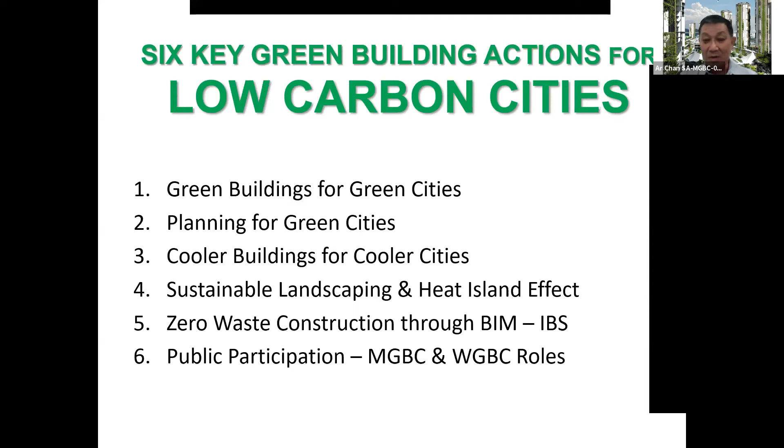Okay, so the next one I will hang on, let me proceed. I don't know why it doesn't allow me at once. Okay, at once downwards. Okay, it's a bit slow, the reaction.

I look at the green building index - is it the right tool? I think there are many tools in Malaysia right now. So we ask ourselves, what is a green building?

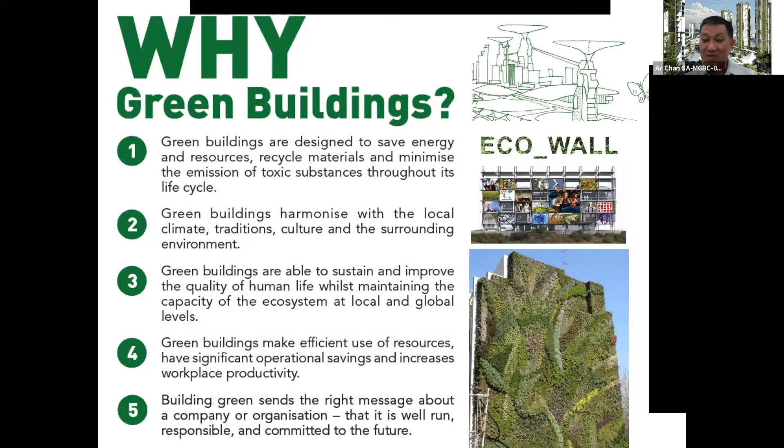Green buildings are the ones which are designed to save energy. They are harmonized to the local environment. They are able to sustain and improve the quality of human life, efficient use of resources, and of course it sends the right message also.

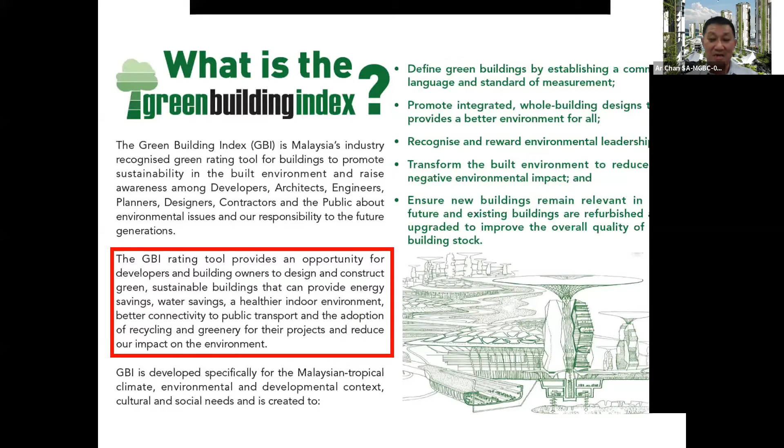The green building index is one of the major rating tools in Malaysia. We founded this initiative back in 2009 with a handful of architects and engineers, and of course industry partners - they're very important - and even Malaysian developers were part of the team in the early days.

Now, the Green Building Index, when it was founded, was one of only 2 building tools that were able to handle what they call equatorial climates. It's one of the few tools recognized by the World Green Building Council.

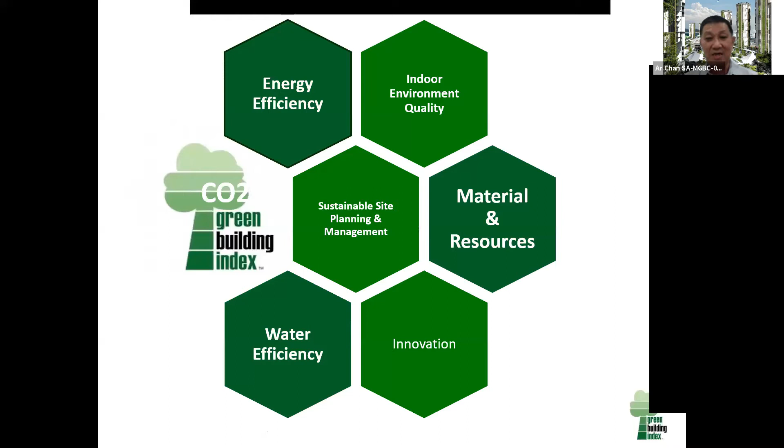In the Green Building Index, we emphasize 6 key components: energy efficiency, indoor environment quality, sustainable planning, material resources, water efficiency, and innovation. When we launched it in 2009, we developed 2 tools: a non-residential tool and a residential tool.

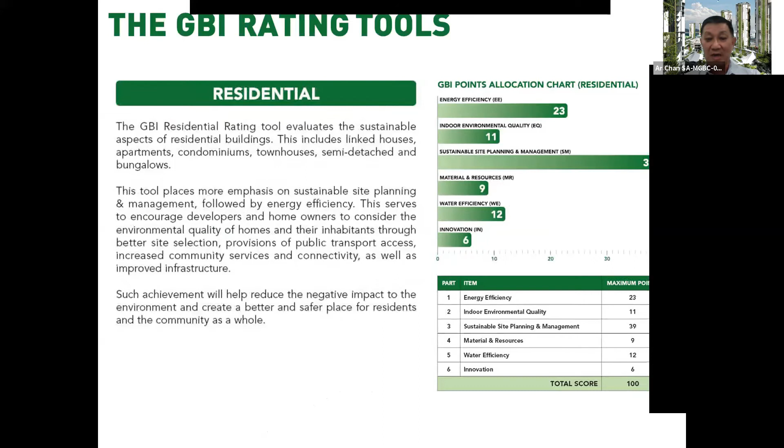If you're looking at the benchmarking of the tools, we already have 10 years worth of information - real data already - and more than 1,000 buildings, and more than 20 million square feet worth of buildings already certified. And if you go back to the database, this is very important in today's environment whereby big data becomes important.

We can see we are learning from the past, from the data that we have. In May 2009 we launched the building index, and this was one of the first non-residential buildings. This is the residential building, and then on 28th April 2010 we launched the Green Building Index for existing buildings.

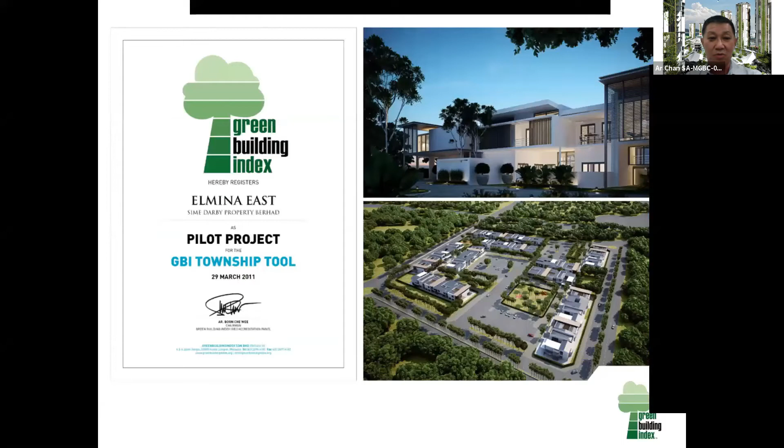We also launched the Sustainable Township in 2011. You can see many pilot projects going through in that. Very important is our green factories.

Why is it important? Because in Malaysia, more than half the electricity produced is actually consumed in our factories. They are an important driver of our economy, and we have to make them very efficient, because in our tool we don't just look at the shell of the building, we look at the entire industrial process of each building submitted for approval in our Green Building Index. This is one of the very unique tools. Other countries don't have it. Even Singapore developed their tools, but they don't look at it that way.

Some early buildings have submitted. Now, even though we have developed 16 tools, we've now gone to 18 tools already. Each time we find significant progress in the industry, new information coming in, new ideas coming in, we update our tools. For example, our residential tool we developed in 2009 has now already reached version 3. Why? Because we need to raise our standard, and also incorporate new ideas that we find from our big database.

So it's on the ground data. It's important that we move forward and improve our tools also. At the same time, we need to emphasize that these tools were not developed in isolation. They were developed with the cooperation of all the respective industries.

For example, our industrial new construction and industrial existing building tools were all developed with the cooperation of FMM. Our tools for hotels and resorts were developed in conjunction with the hotel owners association. So they give us data, we use the base data, and then we develop the tool, and ask for feedback from them. This is where the tool becomes relevant to Malaysia.

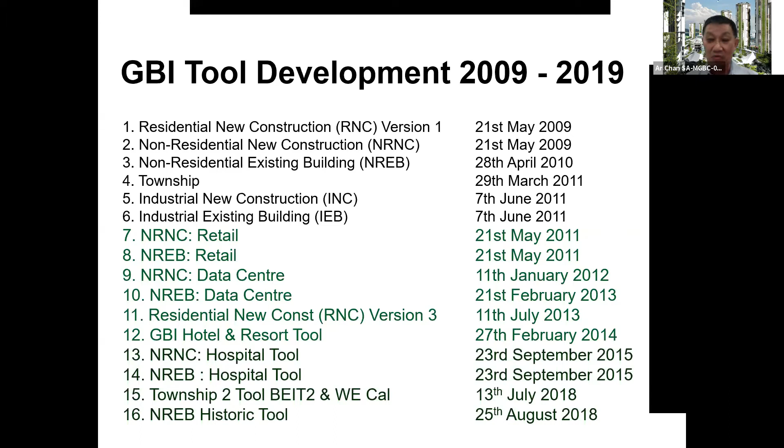Because sometimes complex issues need a lot of collaboration so that we can go further in whatever we do. So these are some of the developed tools, for example the malls, data centers, hotels - all these certified buildings. As of February 2019, the beginning of last year, you can see we already have nearly 500 certified projects, constituting nearly 1,000 buildings, really more than 1,000 buildings.

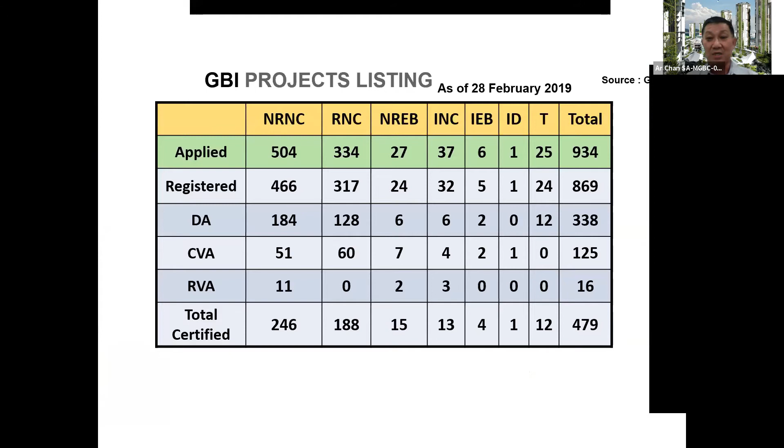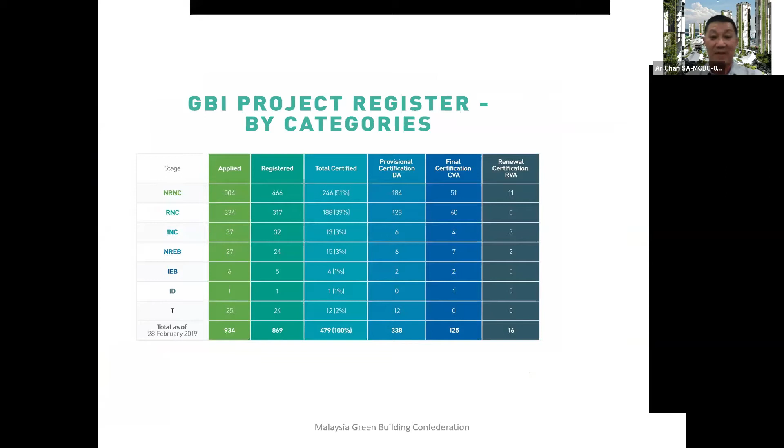If you look at it by registry, we can see the majority of the buildings are in the NRNC, non-residential category, then followed by residential, the general two, then the rest are all less. And you can see the majority of the tools are also in the certified tool category. Certified meaning best practices - buildings which have been designed to achieve best practices.

Whereas gold tool buildings achieve gold, they are best in the nation. If you go to platinum, you are the best in the world already. And sometimes, although they are best in the world - sorry, best in the world - sometimes the economics might not make sense. So it has to be a proper balance. It's up to the individual owner how they want to achieve that.

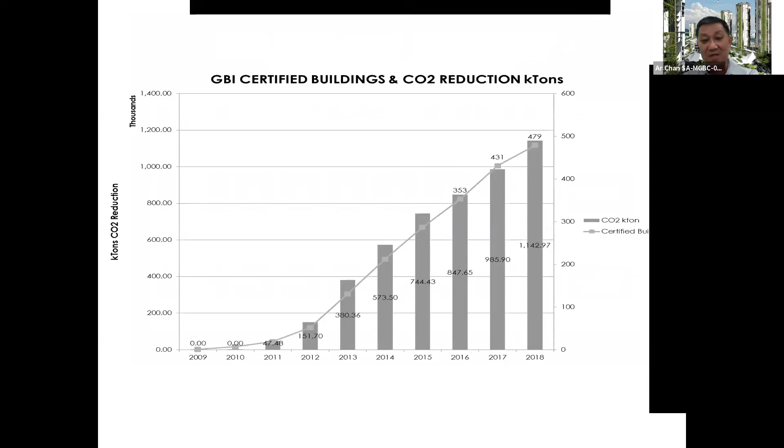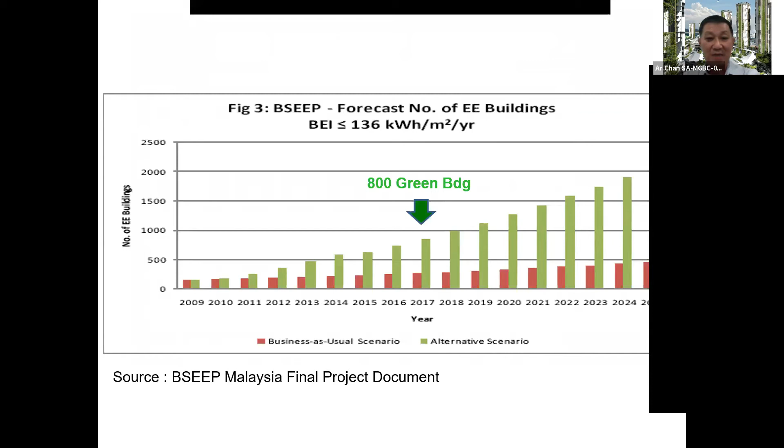So you can see this is how we have been achieving that since end of 2018 and 2019. In fact the BSEEP forecast was for us to reach a BEI of 136 kilowatt-hour per square meter per year energy use by 2017, targeting about 800 buildings. We actually achieved that already, and the CO2 target was also achieved back in 2017.

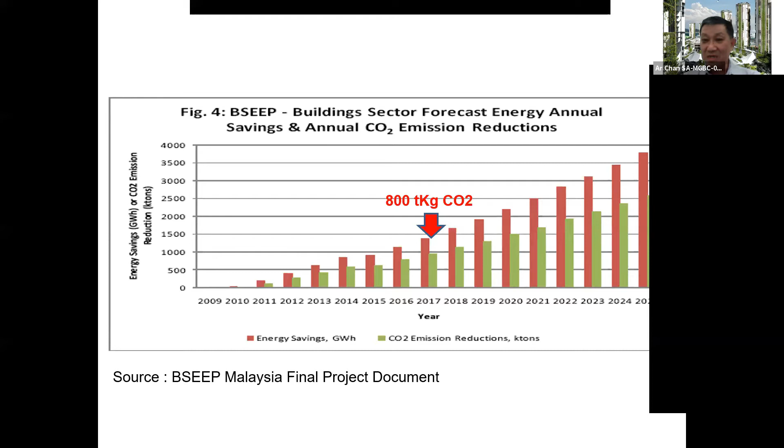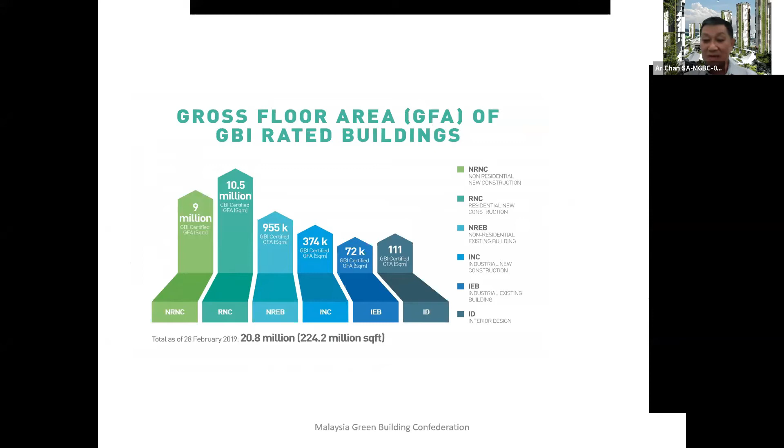If we look at it by million square meters, RNC was the biggest at 10 million, and NRNC tool was 9 million, and if we total it up, we have already reached 224 million square feet as of February 2019. Now already, I think we are reaching about 250 million, close to it.

So these are the different figures, if we measure in terms of carbon reduction, 1049 kilotons of carbon dioxide. I think sometimes it's very difficult to relate back to figures like this, but they are significant measured figures which we send to the government on a monthly basis.

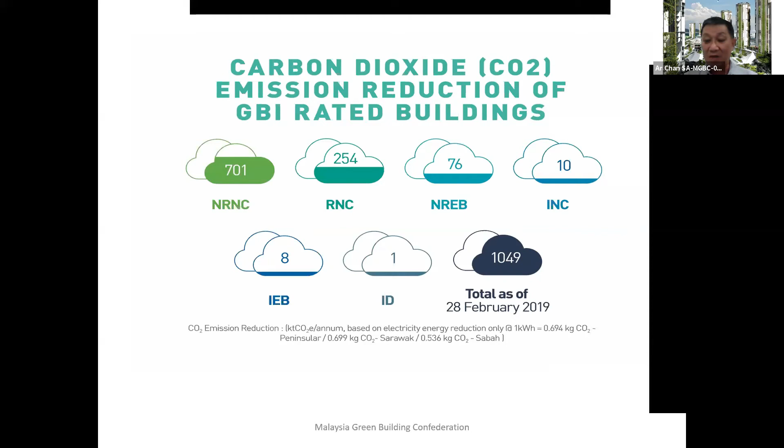And also, because we break it down to different states and regions, we also send it to the respective states and regions who are interested, informing them of how they are performing in terms of carbon reduction and also how many green buildings they're doing.

So this is a clear record. We are not talking theory anymore. This is real records and real data, which they can always come back to us for, and we can feed back to them what they need to do in the coming 10, 15, or 20 years or so.

So a lot of people ask us the question, why form the GBI? The GBI was formed in collaboration between the Malaysian Institute of Architects and ACEM, the Association of Consulting Engineers, and then we formed this intellectual property to safeguard it so that it's easily available to all Malaysians, whether they are developers, architects, engineers, quantity surveyors, or even town planners. Anybody can access the data.

All our tools are online, all our guidelines, our books, everything, all the research, all our talks - even today's talk will be online. You can see later on, we will upload it, and that's the website you can go to. This is one of the websites. Everything is free, because it's supported by our own institutes.

We pump our own money in, and we are in the process of proposing to turn it into a foundation. So this is a not-for-profit organization. Whatever profit we make, we actually put back into our research and development in order to gain more knowledge and improve our environment and make our country more sustainable and low carbon also.

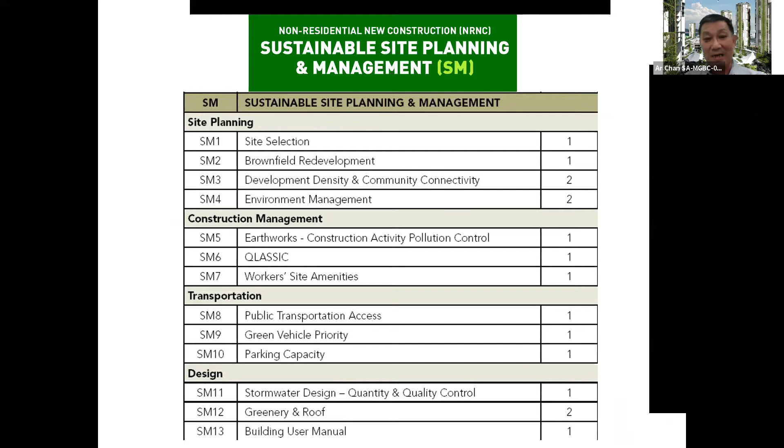Countries will not meet emission reduction targets unless energy efficiency gains in the building sector are implemented, due to the lifespan of buildings. Failure to act now, energy efficiency and low carbon technologies will lock in detrimental energy and carbon impacts. This is a UN statement for Cancun 2010.

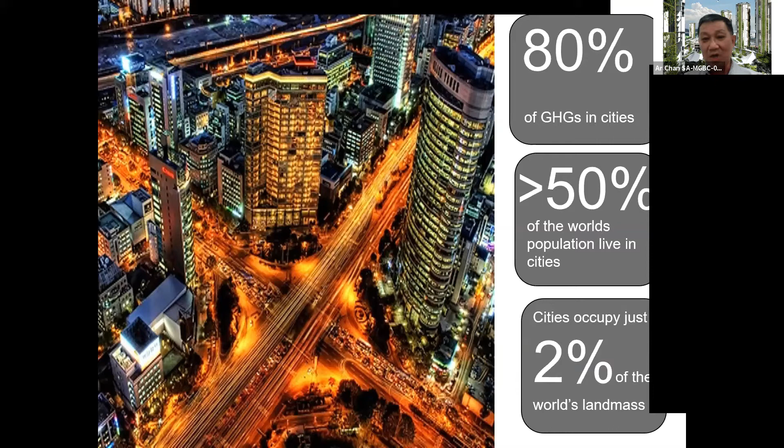So for buildings, you can see cities produce 80% of the GHG, but they are also the ones who produce 90% of the economy and 90% of the impact on the country. So even though they are high producers and high consumers of energy, they are also the ones producing for the country.

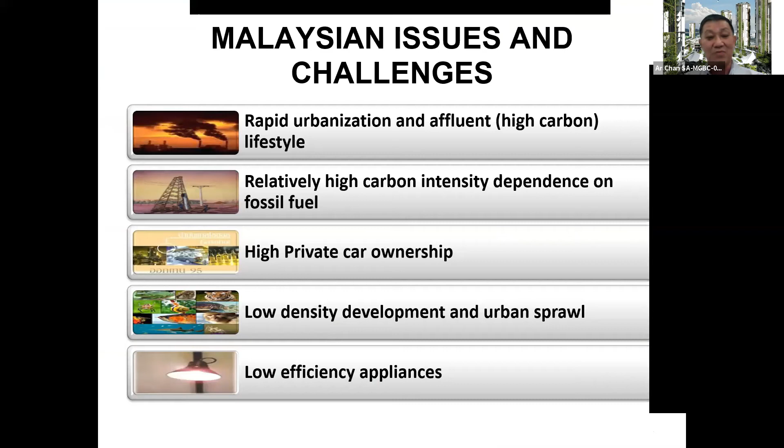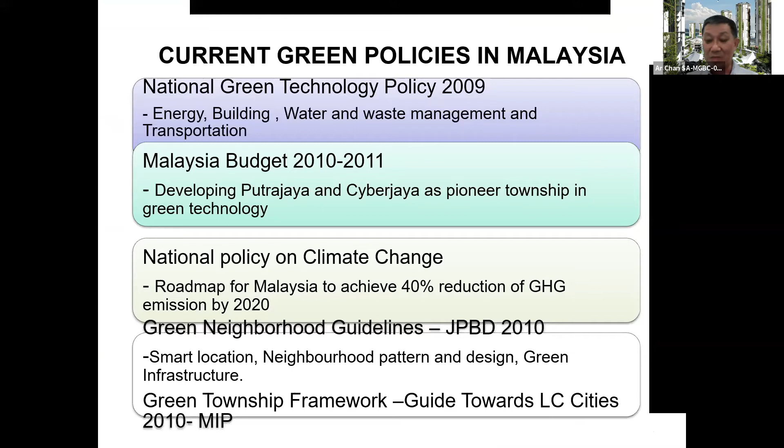So in Malaysia, the issues are rapid urbanization, relatively high carbon intensity, high private car ownership, low density developments, and low efficiency appliances - maybe less of this now. I won't go through this one. These are the policies we have implemented in the country to tackle this low carbon problem in Malaysia. This is a planning issue.

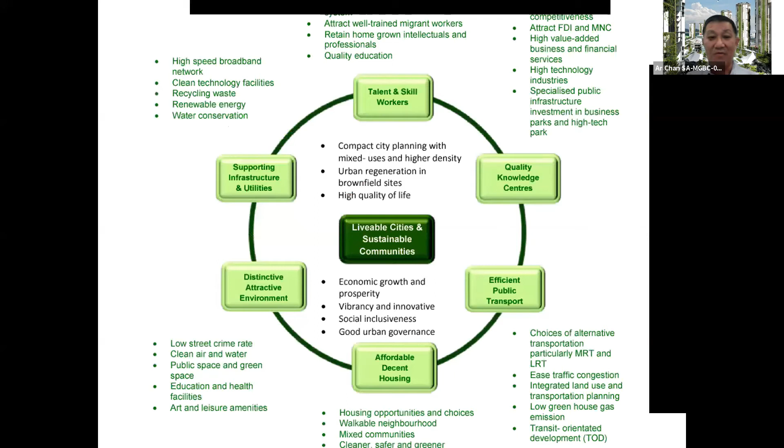And if you go to current spatial planning - I think this one was already covered by one of the earlier speakers - livable cities, sustainable cities. Now, KL is one of the few cities which have already started to produce their own blueprint and target for 2030 to be a low carbon city. This one is done again by University UTM, by Dr.

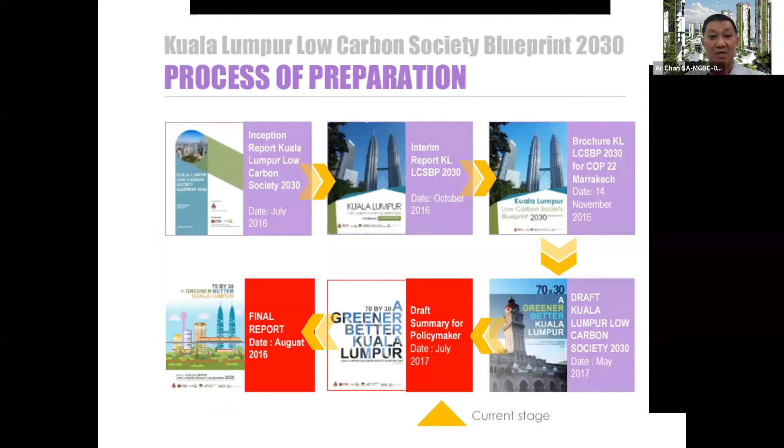This study was done in collaboration with Kyoto University. I think the same group have also done studies for Putrajaya and Cyberjaya, and with that implementation you can see the process of preparation of the plan. They have come up with 10 key actions, 38 sub actions, 83 measures, and 253 programs.

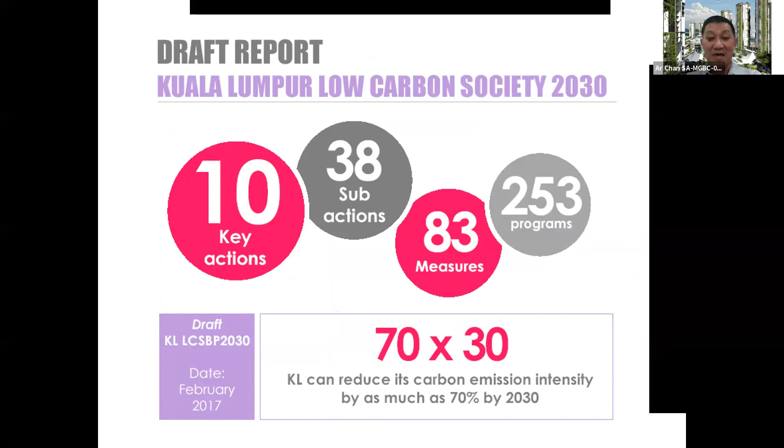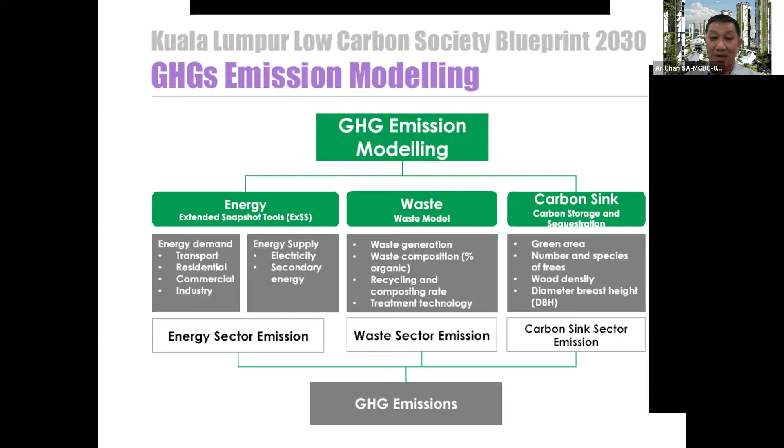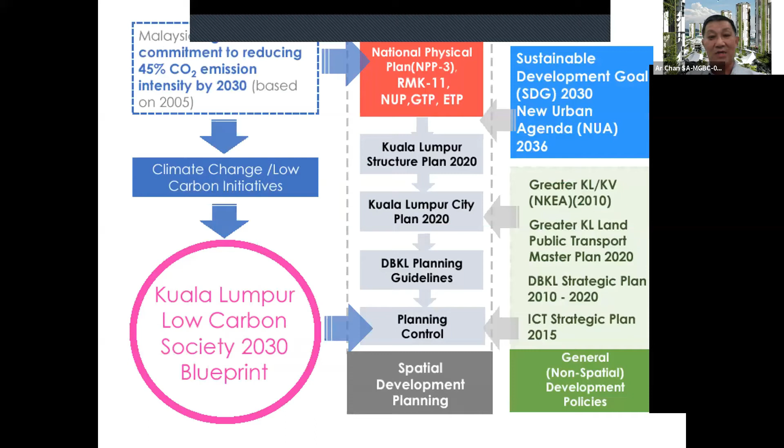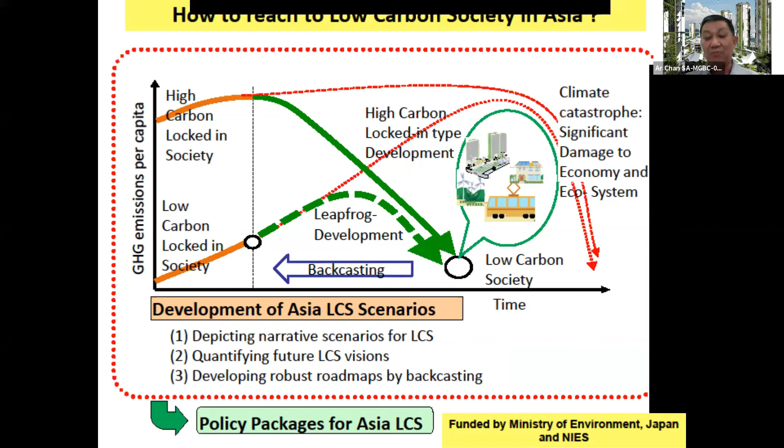So what are we actually trying to do? Instead of allowing that movement through time to reach catastrophic levels, we are bringing our economy to become a low carbon city by taking actual measures, studying what we need to do to reach these low carbon cities.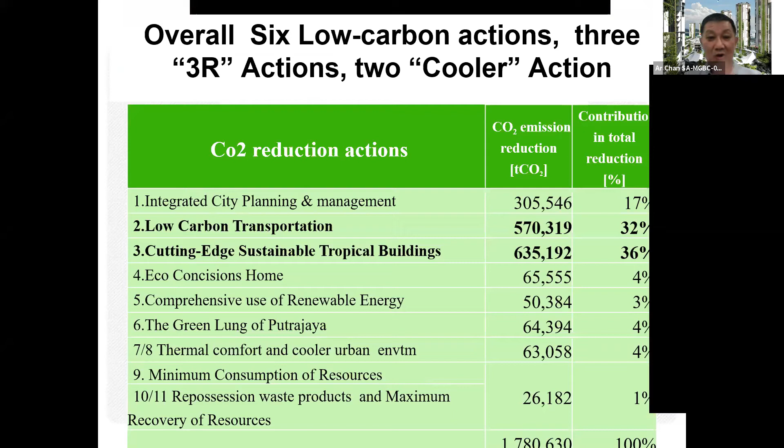I don't want to look at this in detail, but I think the target set by the Malaysian government by 2020 was 40% carbon reduction. I'm not sure whether we've achieved that, but looking at our figures, I think we are quite close to it already.

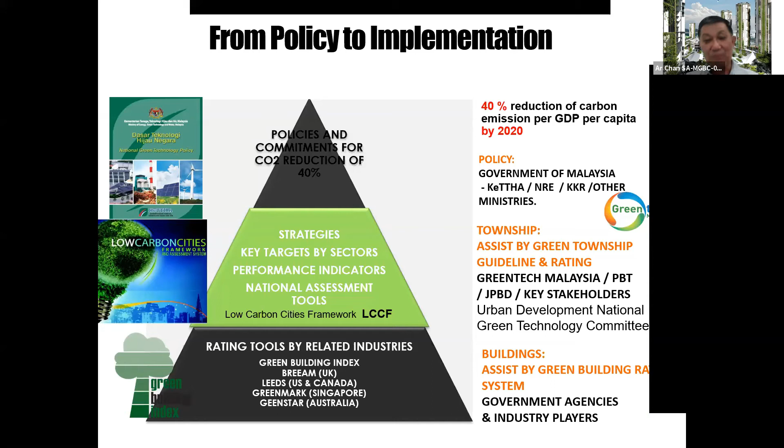Smart growth principles, I won't talk about it now. Cooler buildings are actually green buildings, they're actually cooler buildings. Low carbon cities are cooler cities also, okay?

When we look at energy, which is the key thing we want to look at now, electricity users are the biggest consumers and produce the most carbon. Our electricity plants produce about half the CO2 we have in our environment. Industry, excluding cement, makes up about half of it as well.

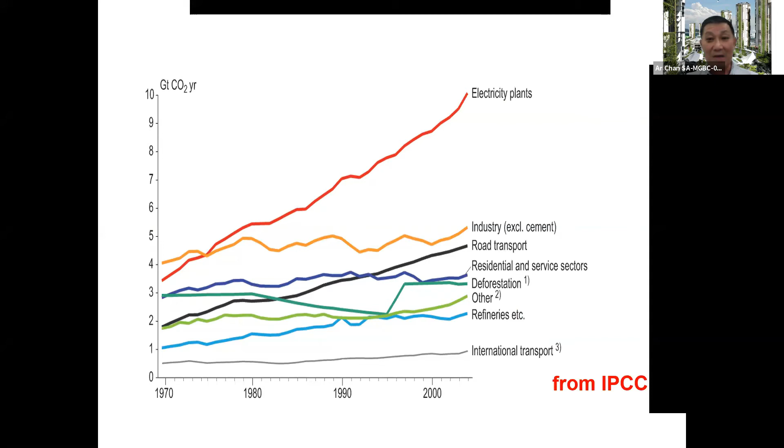So all our buildings, all our cities actually run on electricity. Unfortunately in Malaysia, many of our power plants are still running on coal-fired power plants, so we need to reduce that.

Now, the local issue is high energy consumption per capita. Look at that, that's up to 2001. I don't know how we are doing now, but you can compare a lot among ASEAN countries. The one country that has achieved very well is Singapore - you can see the blue color line just below Malaysia.

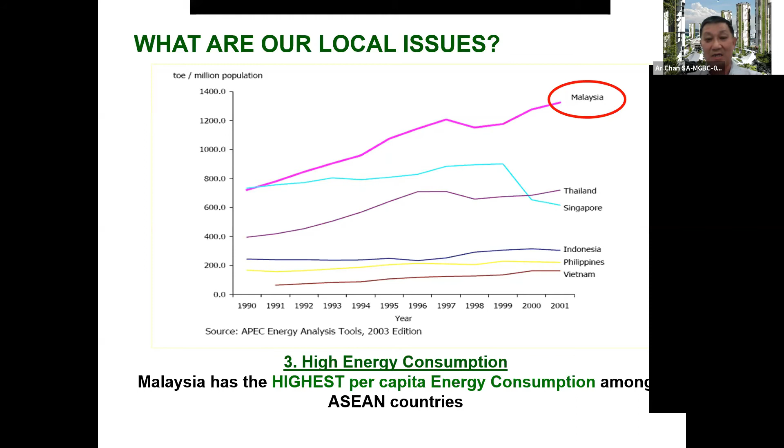They have gone down, with a big dip in 2000. Why? They implemented policies for buildings to achieve cooler performance, and also introduced other green building features which they started to implement and encourage in their cities. So they were able to bring down their usage figures.

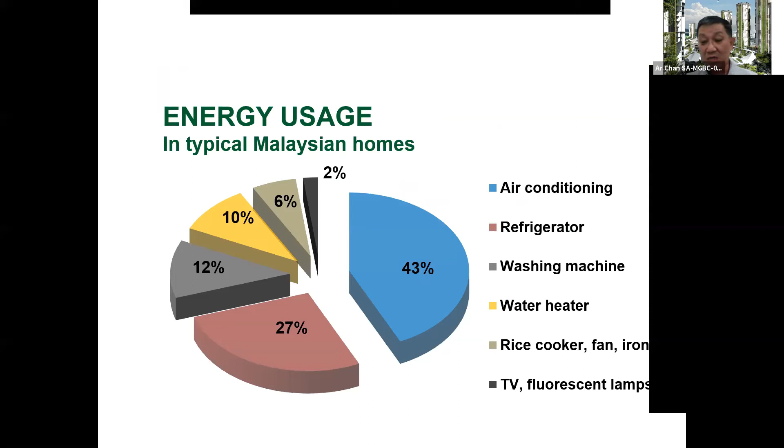Now, in the typical Malaysian home, air conditioning is one of the key issues. Refrigeration and cooling alone take up more than 70% of the energy used in a typical Malaysian home. Whereas in office buildings, 60% comes from the cooling load, the air conditioning load itself.

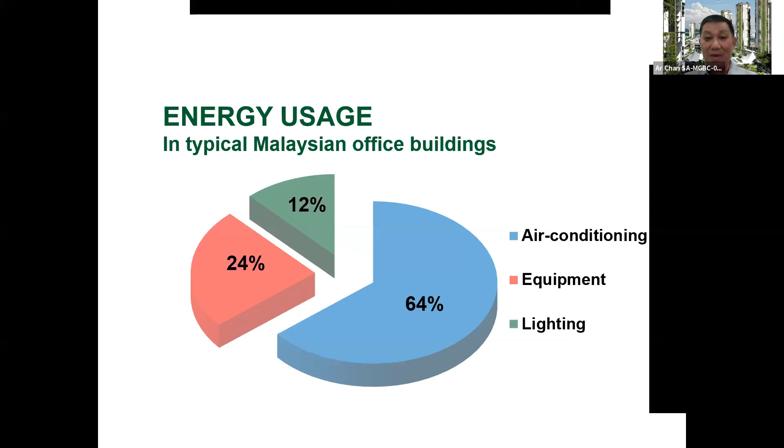So in order to reduce the energy used in buildings, and therefore less energy from the power plants which is the highest carbon producer in the country, we need to focus on cooling our buildings - not only the building itself, but also the microclimate surrounding it.

So we need to understand things like OTTV, RTTV, U values, and net zero. These are things I will not go into detail on - you can do research for yourself.

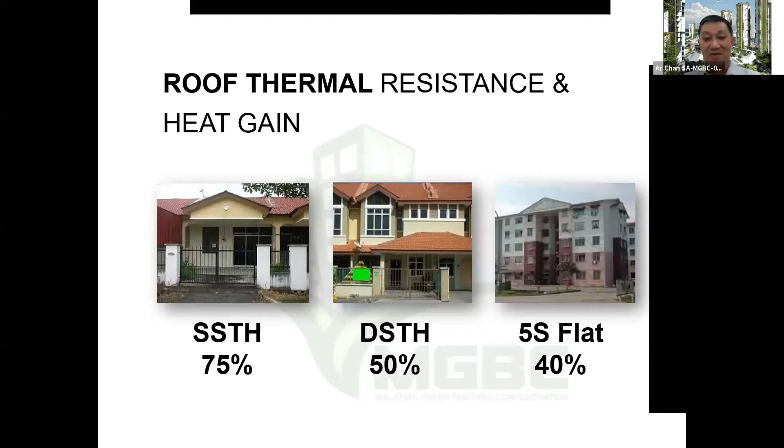In Malaysia, if you are a low-rise building, 75% of your heat goes in through your roof. Double-story terrace, which is the biggest and most common form of residential housing in Malaysia, 50% of your heat goes in through the roof. So you need to either insulate your roof or reduce the area of your roof - which one you want to do is up to you. For flats, it's about 40%, so you need to either reflect the heat back or insulate against heat coming into your building.

Very important, I'll show you one example of how I measured this. This is the Royal Mosque in Klang.

I was engaged to assess their refurbishment of this building. They were trying to prevent leakage through the solid concrete roofs and all that. So JKR did this project.

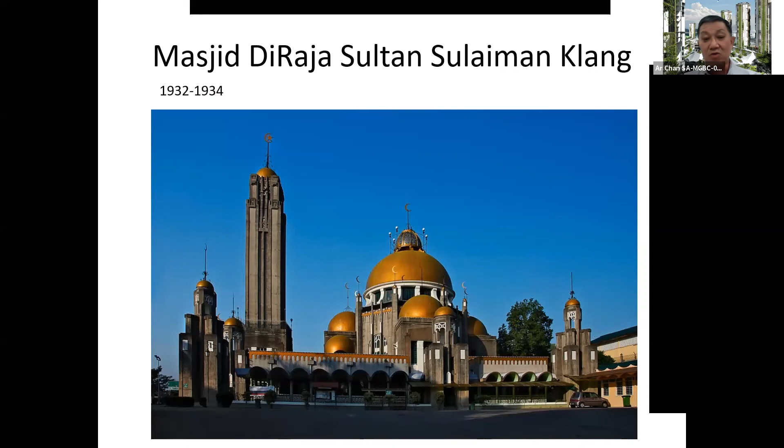So insulation has a big impact not only on the temperature of the roof itself. Imagine people go to prayer at 12 in the afternoon in the roof - the temperature at 31 is a huge difference from 35. If you apply some fans down there, you can reduce the temperature by another 2 degrees, so about 29, 28 degrees centigrade. It's actually a lot more tolerable than if you stay at 35, 36 degrees centigrade.

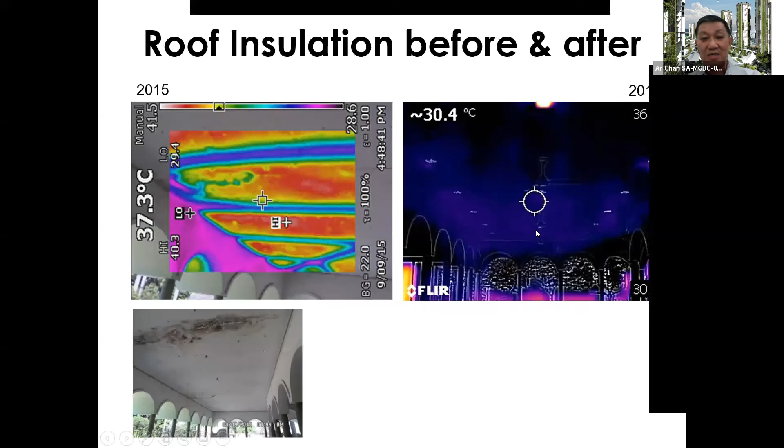You can see these are the same thermal pictures of the outside and inside, before and after 2017. You can see the temperature differences.

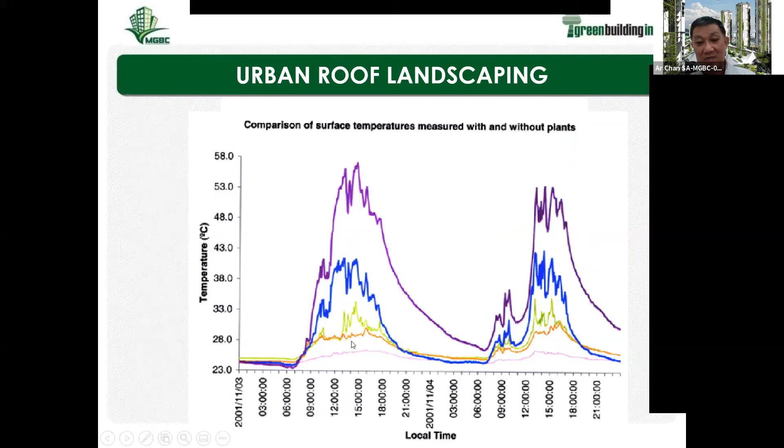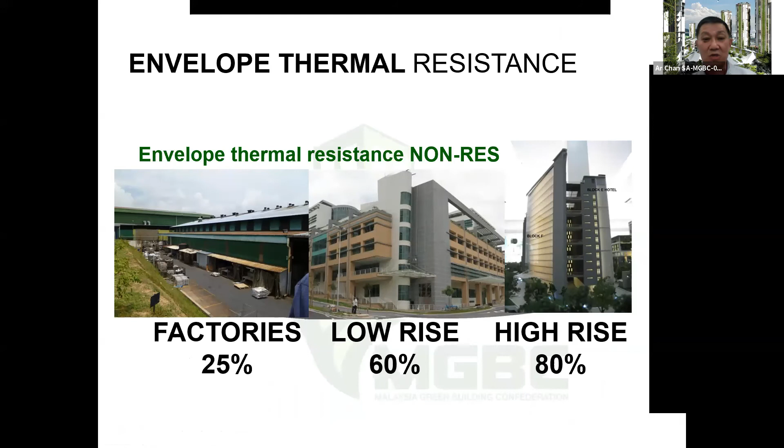So the other thing after the roof, of course, is the building envelope. If you have a low-rise building, the impact is less, but if you have a high-rise building like an office block or apartment block, more than 60%, 80% of the heat goes in through your elevations. So it's important that you understand what is OTTV and heat conduction through the walls, through the windows, and the heat gain through the windows.

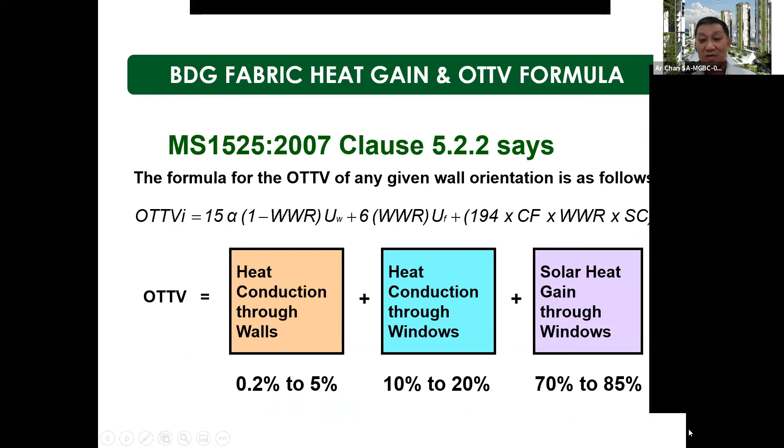I cannot go into detail on this one, but you need to look at this formula. This formula is now applied in what we call bylaw 38A in our Uniform Building Bylaw. This has been amended in 2012 and it's already law. So any non-residential building more than 4,000 square meters needs to apply this bylaw already.

This is designed to meet the requirements of MS 1525, meaning you have to insulate your roof and reduce the amount of heat entering your building. This is passive design itself, and it's already implemented in the law. Currently, we are waiting for all the other states to follow through with their state bylaw implementation.

To date, 4 states have already passed it into their local bylaw - mainly Selangor, Penang, Kedah, and Terengganu. So it becomes law now - any renovation, any new building, you have to follow this bylaw. It means you have to put insulation in your roof and make sure there is no direct sunlight producing heat in your building.

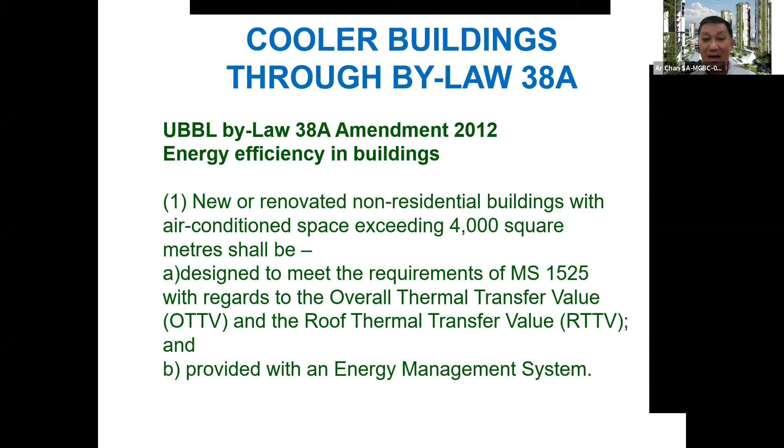Sustainable landscape is what we know as improving the microclimate of the building. This is sustainable planning - okay, look at it.

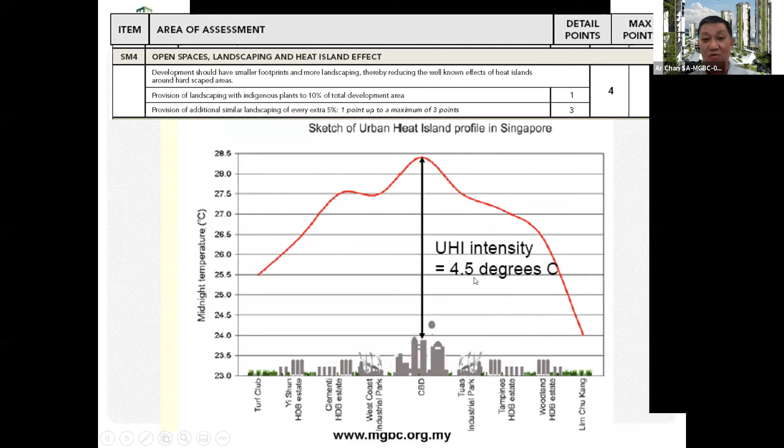This is a profile measured in Singapore. You can see the city center of Singapore typically heats up to 28.5 degrees, whereas if you go to the outskirts, it can go as low as 24. So there is a difference in the microclimate.

So if your microclimate is at about 39 - if you have a lot of tarmac, very few trees, and hard surfaces which absorb heat - then if your indoor temperature is 25, you can see the delta T is 14 degrees centigrade.

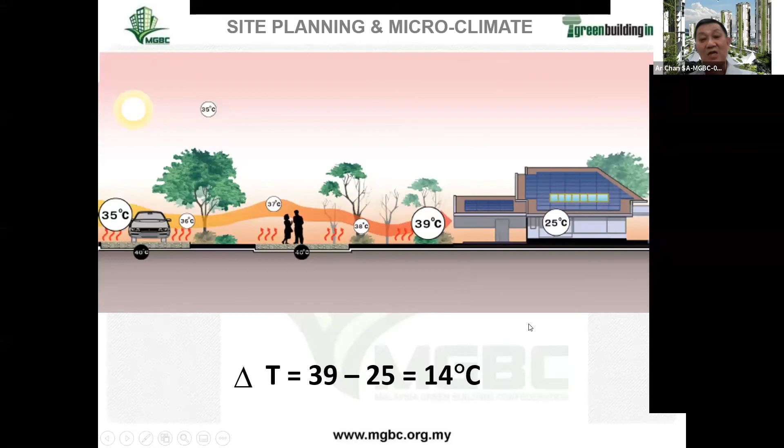Whereas if you have a lot of water bodies, a lot of landscaping, a lot of shaded and light colored surfaces, your temperature can go down to as low as 32. So if you're at 32 minus 25, your delta T you're tackling is only 7 degrees centigrade. So 14 and 7, look at the big difference. This is where microclimate planning is important, to have as much landscape as possible.

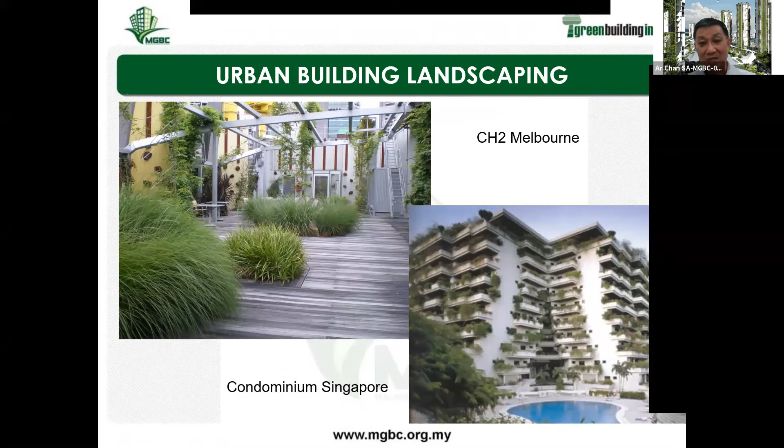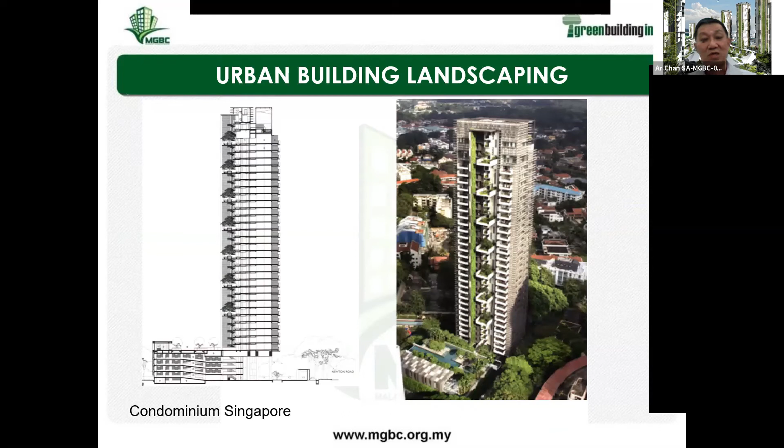This is a typical effect. So in urban planning, we as planner and building designer need to put in more landscaping. In typical planning bylaws, they always say 10% of your ground area must be landscaping. And a lot of local authorities also don't give credence to vertical planning, vertical landscaping like this one here.

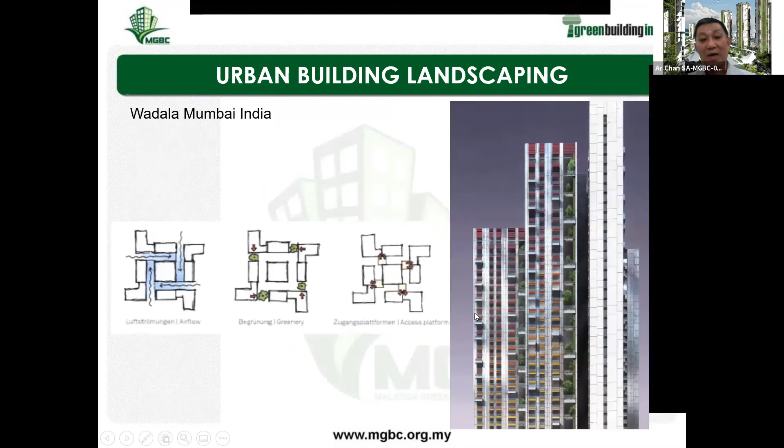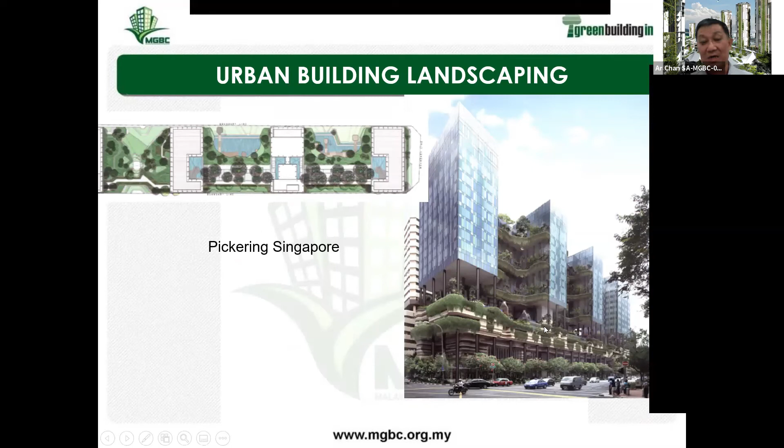You see a lot of vertical landscaping. This is some of the urban landscaping. So when you start to landscape at the upper floor, you actually contribute to the microclimate of the building itself. So this is one example. Singapore has done a lot of detailed research and encouragement of urban landscaping. I think they are the world leader right now in terms of urban landscaping.

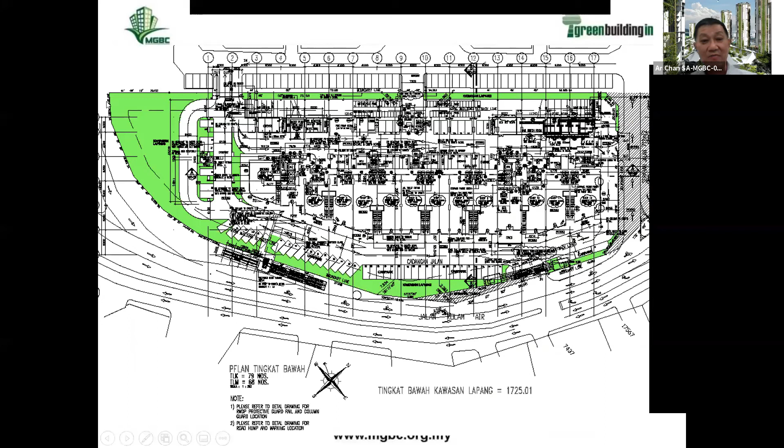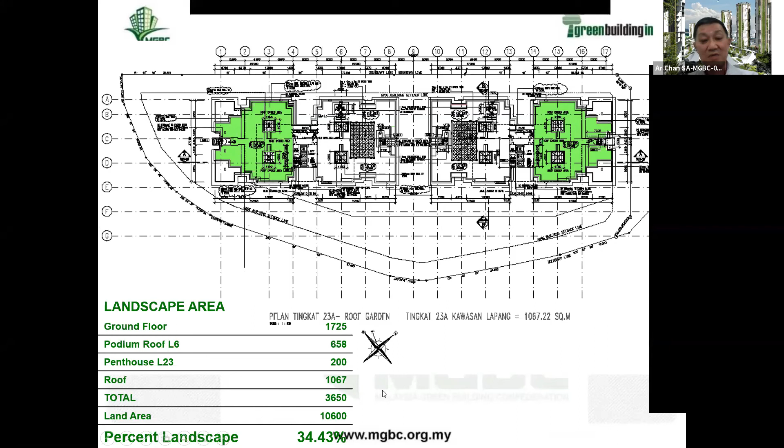Now, a very useful source of information about how you want to landscape your roof and podium areas - you can go to NParks Singapore, and this is one of the useful sources of information. Because I find that a lot of building owners, when I say landscape your roof, landscape your podium, they say, oh, a lot of leakage is coming in. Actually, that's not the issue.

The issue is doing it right. When you do it right, not only does the waterproofing last longer because there's no swing in temperatures, but it also protects your waterproof layer, and it keeps your microclimate cooler also. So actually, it's the technology of how to do it correctly, how much to use, and when to use it. This one is in Singapore - they've done a lot of research about this. Go to that website and get the information.

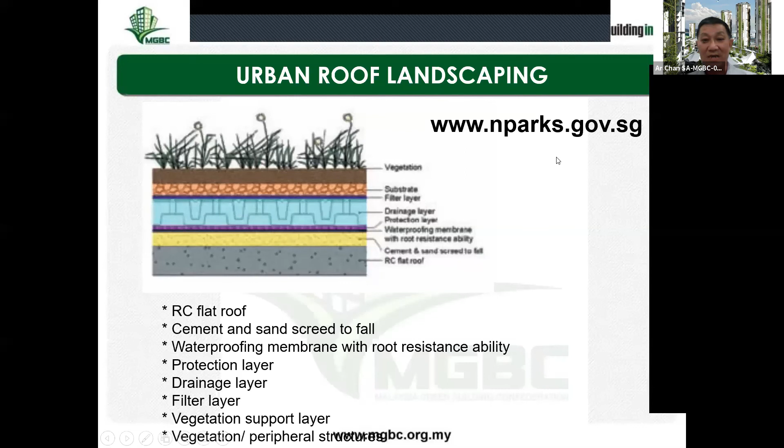The last one, almost the last one that I want to talk about is zero waste construction. What is zero waste construction? Now, earlier on, Renu has talked about the circular economy - there you recycle everything. Now, in construction, data from the world data, it's very clear that construction constitutes about 40% of the total dump site waste, solid waste. We're not talking about organic waste or anything here, just solid waste in all the dump sites. 40% comes from construction. If we do conventional construction, typically we contribute a lot of waste.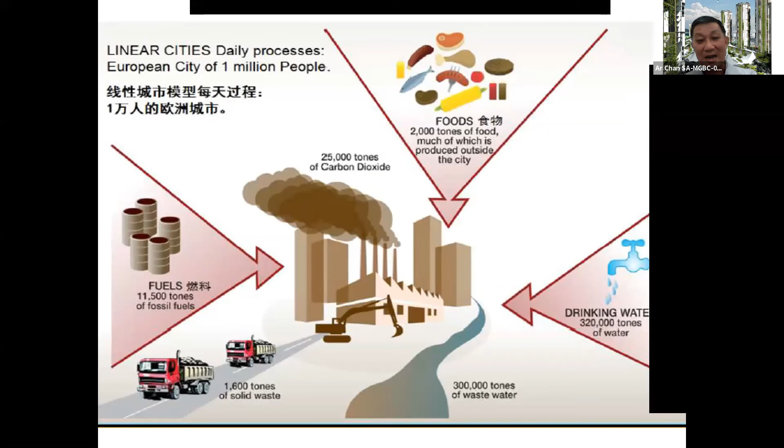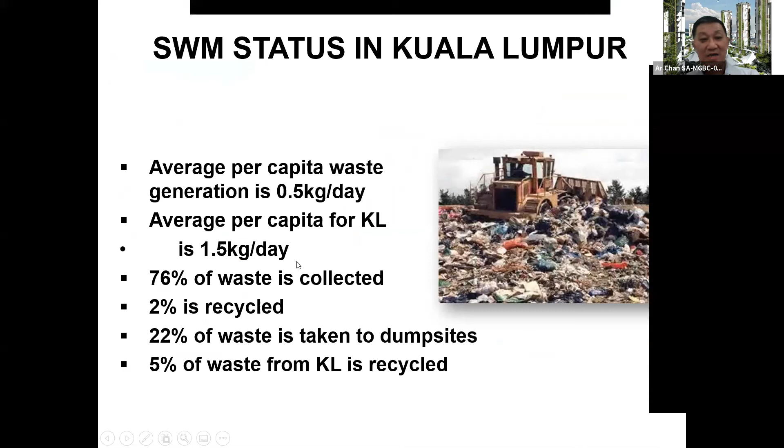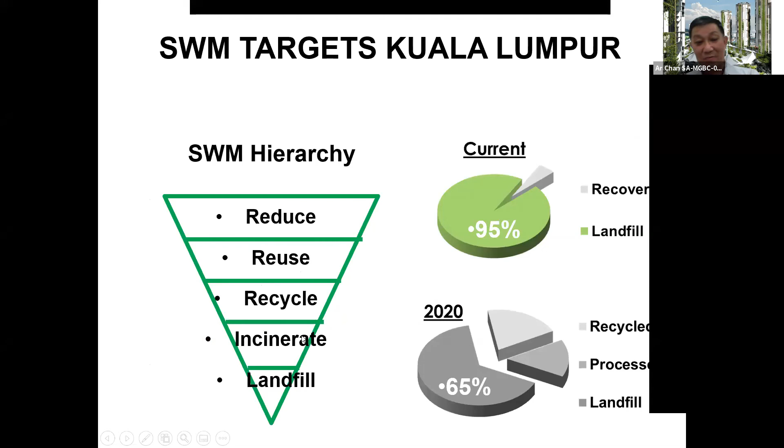So to reduce the waste, zero waste construction needs to emphasize on 2 things. One is building information modeling, which is the new technique of designing buildings to reduce the amount of waste coming out of the building. And then what we call IBS integration. When we integrate these two, we are able to produce buildings which are, let's say, for example, this one here.

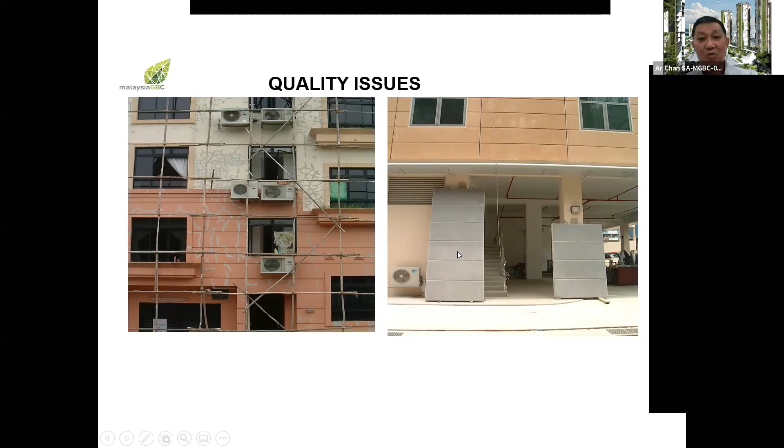If you are using conventional construction, you've got to hack off and re-cast again. Whereas if you use precast systems, you can see the line can be produced with minimum quality issues. Productivity also improved almost double. This is a study done by a researcher in Singapore.

Buildability score is what is our IBS score, and then the productivity. The higher the buildability score, the better the productivity. You can see this line here through a few hundred buildings here. So actually, it is worth doing it.

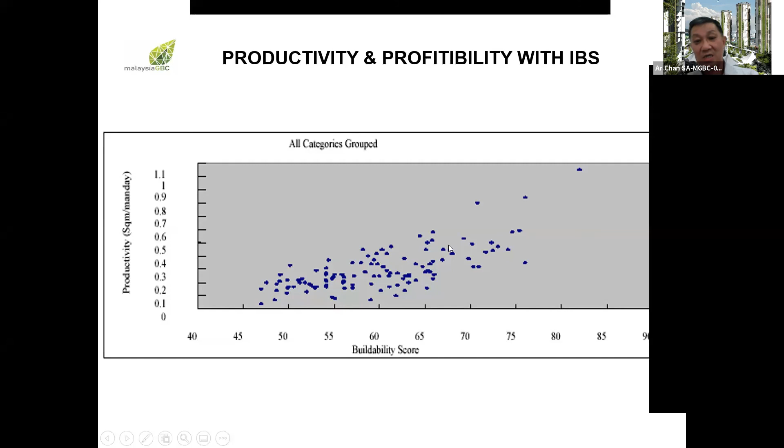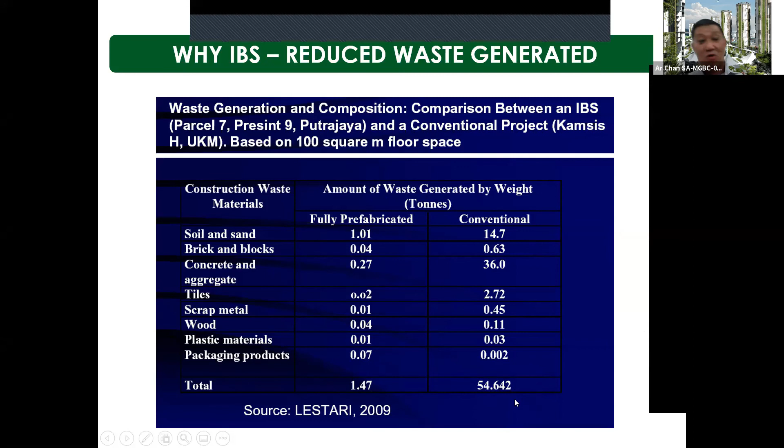The other benefit is we reduce the amount of waste generated. This is based on research done by LESTARI back in 2009. You can see here they took a fully prefabricated building, 2 tons per 100 square meters, whereas compared with conventional, we are producing 50 tons, almost 20 or more than 20 times more waste generated in conventional construction.

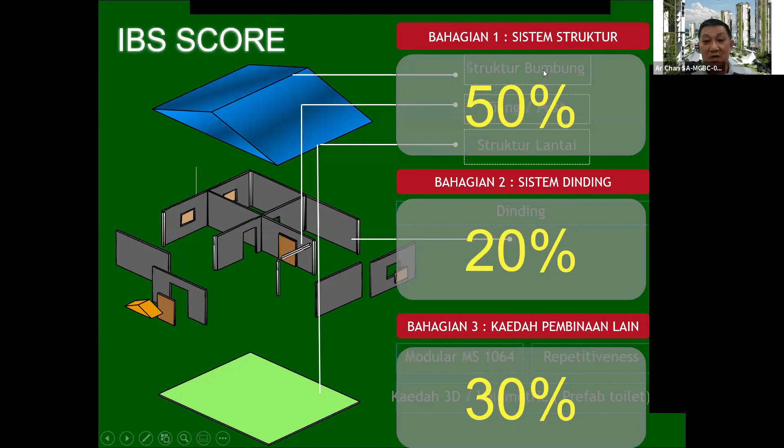So how do we actually calculate the IBS score? I don't want to go into detail of this one, but you can see the structure is one of the key elements in producing it, the walls, and so on, and the other matters.

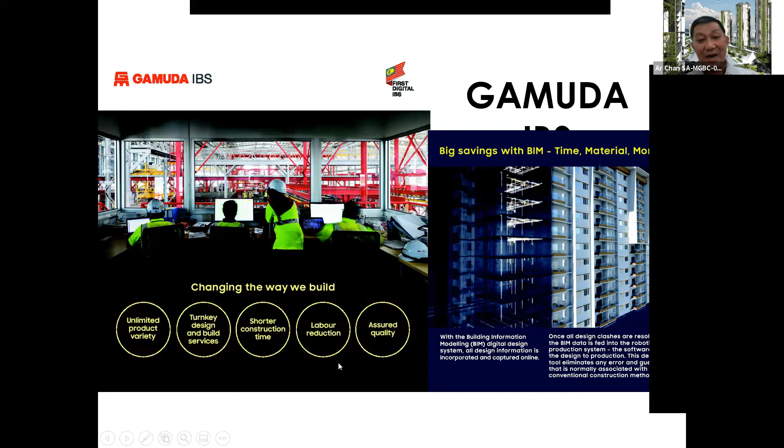Now, I don't work for Gamuda, neither do I have anything to do with them. I'm not advertising for them, but they have actually brought in a system. They have now got 2 precasting plants which are fully automated, which can fully accept BIM data. Once the BIM data goes in, they can convert it into how many slabs they need to produce, how they can quickly lay out the slabs and then start to produce the concrete slabs. This is an automated process. Everything is automated.

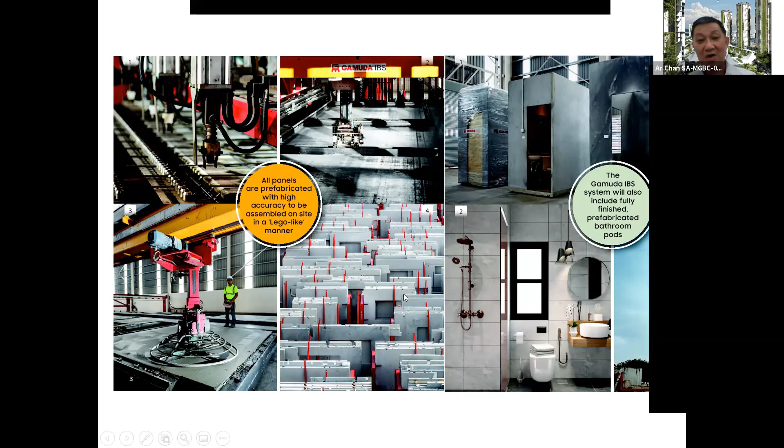By doing that, they have managed to reduce the waste. In the early days, I believe they were at about less than 5%. Today, they are already pushing towards less than 1% waste. Imagine a building whereby everything is produced in the factory, taken out to the site, and then they install it, and that's it. The building is finished, with minimal waste of products. So it's fast, about 12 months improvement, more efficient, reduces foreign labor, and minimal waste. Now it's already down to less than 1% waste coming from the factory.

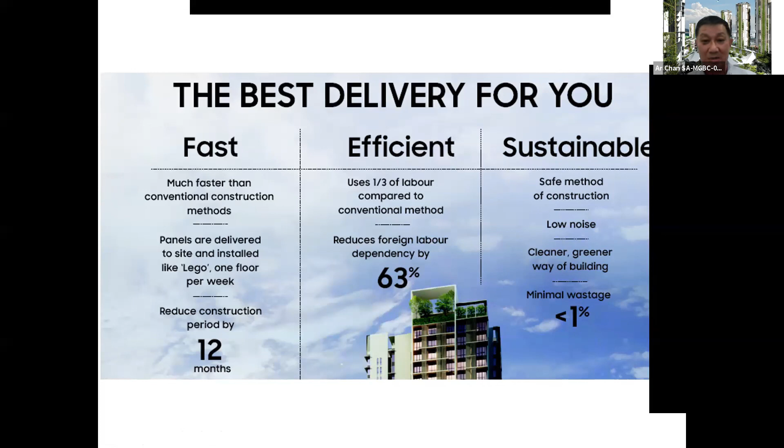But there is what they call a cost of building issue. From my own experience with projects we've done so far, it's only about 4 to 5% extra cost for the building. But when you look at the overall cost, actually it's cheaper, when you look at the overall picture rather than just the upfront cost.

When you look at the rework portion, which a lot of people don't consider when they go into a building, rework is actually a reality in life. Sometimes when you do the thing wrongly, the house buyer or the owner doesn't want that finish, the quality isn't up to his specification, and he asks you to hack off and redo it. That can be between 5 and 15% of your total cost. A lot of people who do research in this don't take that into consideration, but that is the reality on the ground.

So how do we get more people to participate in this low carbon initiative of Malaysia? It's important that we participate through organizations like MGBC and WGBC. MGBC is one of the earliest green building organizations in Malaysia. We are a member of WGBC, established in, I believe, 2011, about 2 years after we formed the organization.

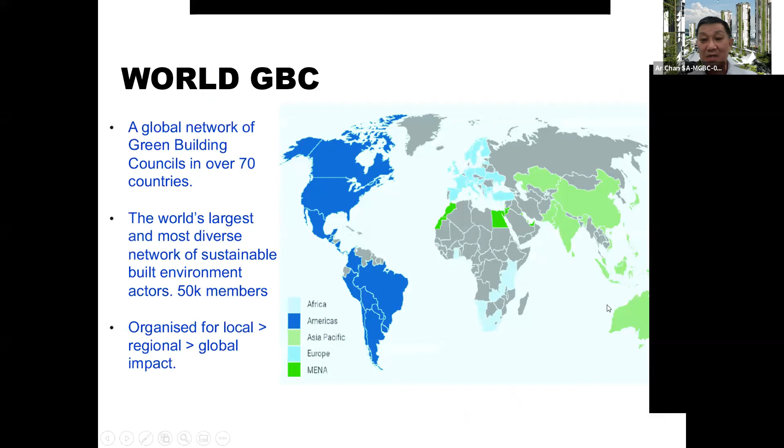WGBC is a global green network, and we are part of the Asia Pacific region, shown here in green. We rate, we educate, we advocate, and we collaborate. These are the World GBC roles. We contribute towards green cities, national policies, existing buildings, healthy buildings, and high performance buildings. These are the key work areas of GBC, which then filter back down into Malaysia GBC.

If you look at the world figures, we have already done 1.2 billion square meters of buildings in 31 countries. 5 net zero building certificates have been issued. These are the worldwide figures.